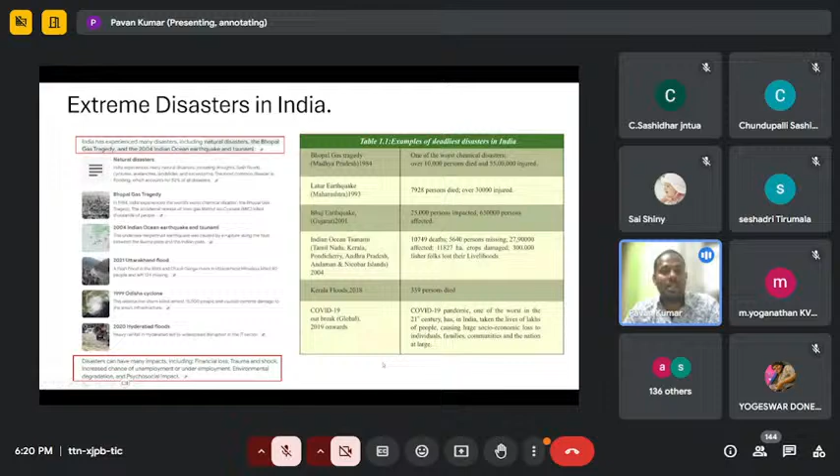Disasters can have many impacts, and the scale of impact can differ depending on the type of disaster, which I'll explain in a minute. As I said earlier, the recent Vijayawada floods are a big reminder that we need to really plan for this. If we don't mitigate it at this stage, the consequences will repeat again and again, which is not good for the economy or the country.

If you look at the types of disasters, they're classified into natural, which you really can't control, and human-made disasters. Within natural disasters, you have geophysical disasters, which happen because of geological disturbance. In this category you can include earthquakes, tsunamis, avalanches, landslides, volcanoes, mass movements, and similar events.

Another natural disaster category is due to extreme weather. Under this we have storms and cyclones, tropical cyclones being very common and increasing because of climate change. Because of these extreme cyclones, you get hydrological disasters, which is flooding, and also biological disasters, including pandemics, epidemics, and insect infestations. The classic example of a pandemic is obviously the coronavirus. These all come under natural disasters.

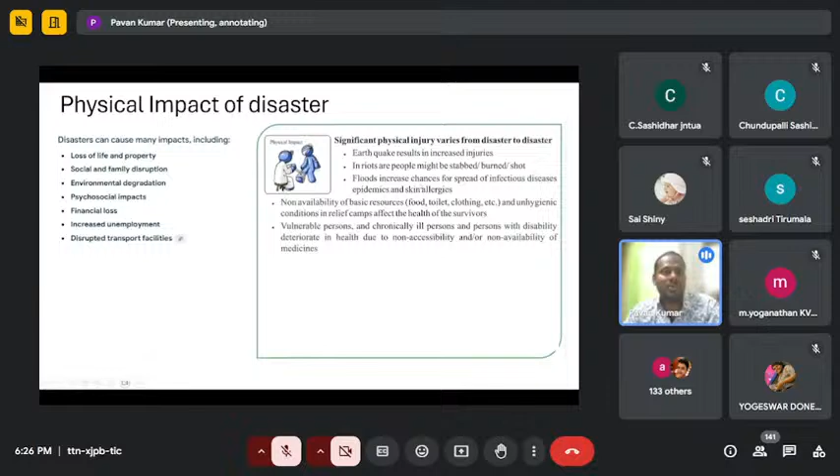At the same time, if you look at the psychological impacts of a disaster, they can also have a wide range. The community can experience shock, denial, sadness, worry, fear, hopelessness, helplessness, self-harm, blaming self or a god, and grief reactions. So the community will experience a wide range of psychological impacts, and I'll come back to who plays what role.

If you look into social impacts, that basically means it's affecting the routine of the communities. So if you take the Vijayawada floods, the recent floods, you can see how the community got affected. As a result, in relief camps, privacy and routine of families get affected, along with displacement and migration, loss of lives, widows, and emergence of single parent families - you can list many impacts. So in summary, the community is going to go through a lot of social impact.

If you look into the economic impact of a disaster, survivors' livelihoods are compromised subsequent to a disaster - financial loss due to damage to property, or death or disability of family members. Trauma and shock could prevent people continuing with work, increasing the chance of unemployment or underemployment, leading to families being forced to borrow money and end up in debt traps. Transport facilities are disrupted. So you're going to have different impacts, and the type of impact from one disaster to another is going to be different.

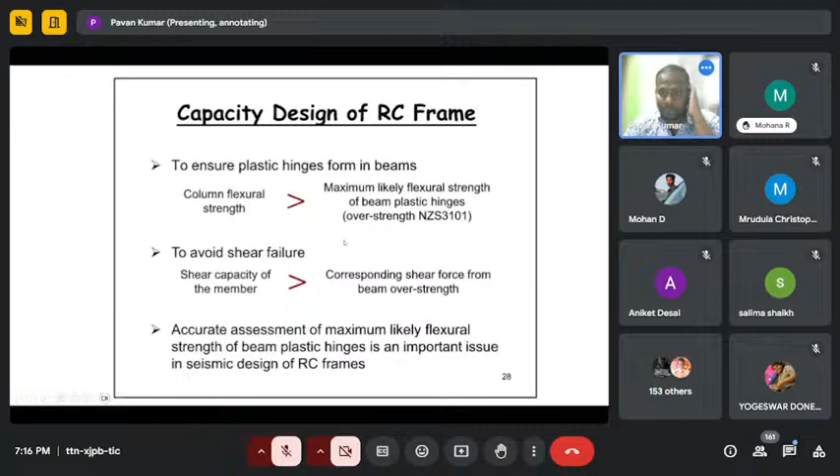Say, for example, you've got an ultimate state where hinges have formed and you've got a lateral load. This beam has hinges at both ends, with an over-strength moment capacity of MO, purely due to earthquake forces. Once you have these over-strength capacities of the beam, you can work out the shear V, which is MO at the left and MO at the right divided by the length of the beam.

That's the shear demand due to earthquake forces, which needs to be added to gravity forces - meaning to avoid shear failure of this beam, you need to design for over-strength capacities due to earthquake forces plus gravity, which will be significantly higher than what an analysis software gives you for these earthquake loads.

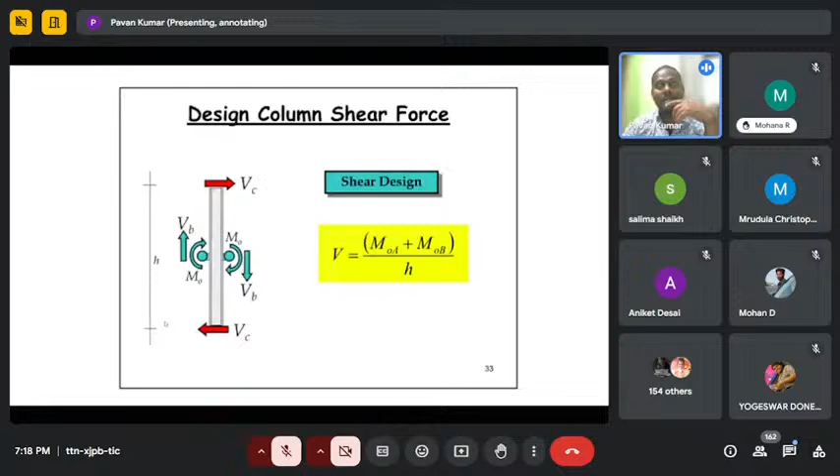If you design for this shear, then you're really going to make sure that shear failure is avoided at any cost. That's how you make sure the strength hierarchy is followed, brittle modes of failure are suppressed, and beams hinge first, which are the weak link if you relate back to the chain theory. So if an earthquake happens, these beams will go first. It's like fuses, right? These are the fuse elements.

And then you can't avoid hinging at the base, which is fine, because it's still a stable mechanism. With this kind of detailing, you can really make sure there is no sudden collapse of the building, and you can make sure even at a 2.5% drift, it's still standing there.

With that, I want to conclude a few things. One key thing is we need to understand that because of climate change, the annual number of natural disasters is likely going to increase. We are seeing more and more cyclones, more and more flood events.

Disaster management needs to be implemented for towns which are going to be converted into cities, for newly planned cities, and already existing cities as well. It's not a task one individual can do, it's a task entire organizations need to work together, and the government has a major role to play in disaster mitigation, preparedness, and post-disaster response.

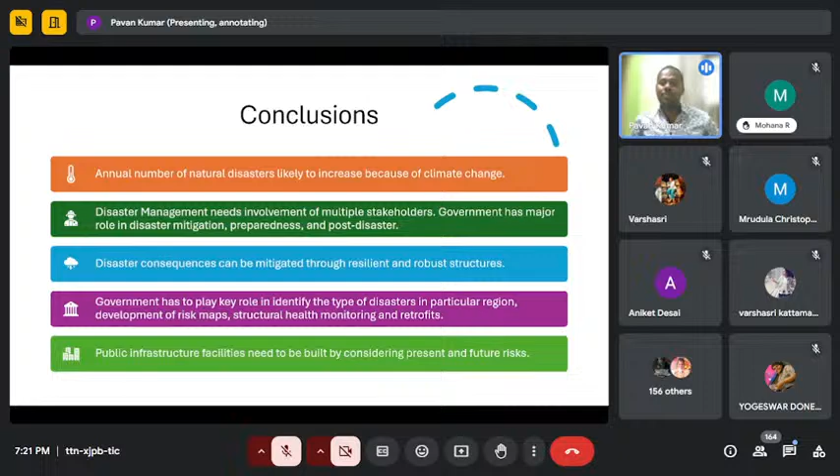And developing risk maps, identifying vulnerable structures, carrying out structural health monitoring, and fixing those structures. Public infrastructure needs to be built considering present and future risks. For example, if a road is being built, you really need to think of a national highway - what will be future risks, whether it's closer to a river, what kind of flooding activity can happen.

As I said, it would be foolish to say we can mitigate disasters in a day, by even 1%. It's a massive collaboration from local governments to state governments to central governments. There is a major role to be played by academicians who are going to advise urban planners and government policymakers.

As I discussed, you can achieve earthquake disaster resilient buildings with different techniques, by utilizing ductility, base isolation, dampers, braces, rocking systems, etc. But the easiest way you can achieve an earthquake disaster resilient building is by utilizing ductility, because you are retaining your conventional system. That's what the next point is.

One key thing to remember always: strong column and weak beam. As long as you follow the strong column weak beam principle when you design, and make sure those weak beams are ductile elements, and columns are designed for high strength demands so that you suppress shear failure, your building is going to be fine.

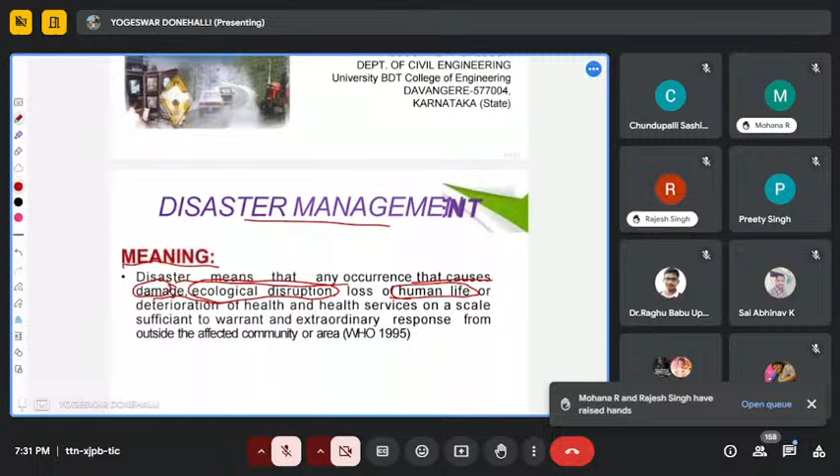Now coming to the types of disasters: there is natural disaster, and man-made disaster. If you see the figure here, floods are shown. Sometimes we are unable to control floods. Let's come to natural disasters, which include droughts. Major natural disasters are flood, cyclone, drought, and earthquake. There are also minor natural disasters, such as cold waves, thunderstorms, heat waves, and mudslides.

If we come to floods, we will discuss one by one. Regarding floods, from a hydrological point of view or water source, people take much care about that. But being structural engineers, we also have to take care—if a flood comes, how do we protect our buildings? Next is cyclones. Whenever cyclones come, low pressure is created and wind also increases.

Whenever the wind increases, building structures located especially in coastal areas may be affected by the cyclone.

Drought means automatically there is continuously no rainfall over certain areas, so people will be unable to live there. There is no crop growth, so all those things may be affected. Whenever drought comes, people usually migrate from one place to another, which increases population density in particular areas. That also may not be permitted for some reasons.

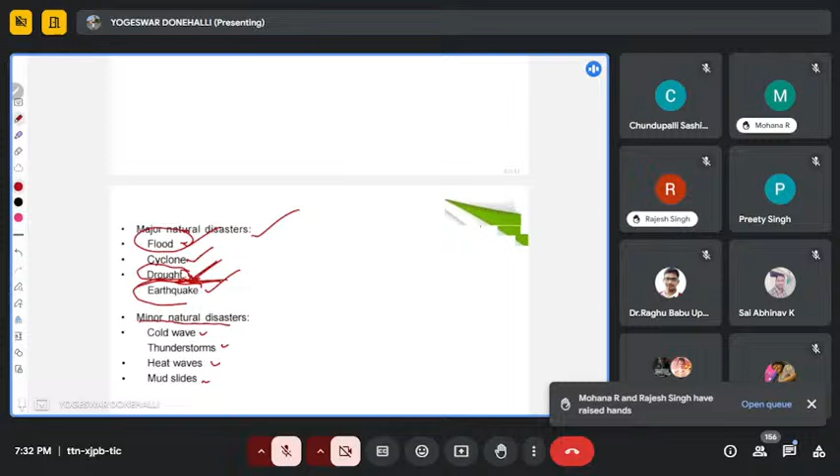Next is earthquake. Being civil engineers, we take much more attention on earthquakes. That is the major one, so we will discuss that.

Cold waves, we cannot obstruct this, but of course we can maintain against it. If you go to the north of the globe, then only you can expect cold waves.

Thunderstorms, whenever rain comes, thunder also will come. It also will affect human beings; some lose their lives due to thunderstorms.

Heat waves affect certain regions, especially if you take the globe at 0 degrees. These areas may be subjected to heat waves because of temperature. Sunrays may come directly, and the zone may be subjected to high heat, so heat waves may be generated.

Mudslides are again linked with floods. Mudslides may be linked with floods whenever rains or precipitation, from a technical point of view, is more, so automatically mudslides also come. Sometimes buildings or small houses may be constructed with mud, and those may slide because the cohesiveness between soil particles decreases. Whenever it decreases continuously due to rain, absorption of moisture and water content may cause mudslides.

So these are the major and minor natural disasters. Sometimes we are unable to control all these things. My point is these things we may not control because they form naturally.

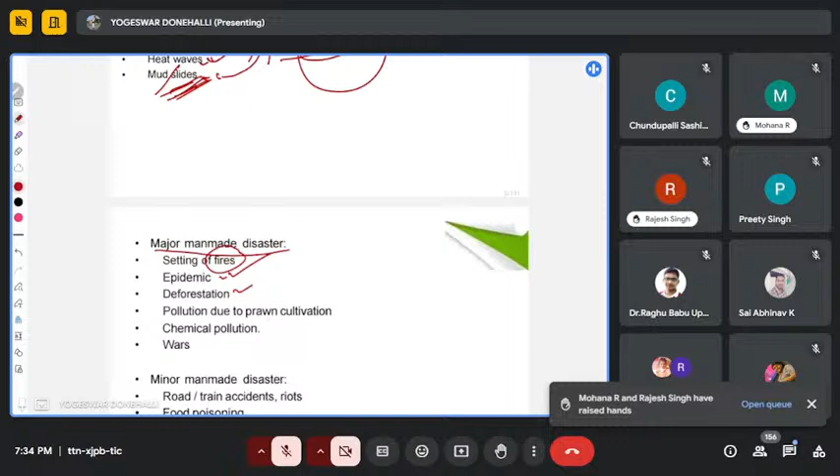Next comes major man-made disasters: setting of fires, epidemics like the COVID virus, deforestation from continuously cutting trees, pollution due to prawn cultivation, chemical pollution, and wars. Recently we have seen the Ukraine war, between Russia and Ukraine. This is also one of the disasters. With all these things, humans may be affected.

Next is minor man-made disasters: accidents, food poisoning, industrial disasters, and environmental pollution. These things, up to a certain stage, we can control by providing guidelines from the government, either state or central, or the World Health Organization. Some things we can control.

Whereas if you come to natural disasters, sometimes we can predict them, since a recurrence period exists, for every 35 years or 50 years. So by taking the past data, we may consider the design of structural members, elements, or the entire integrity of the structural elements.

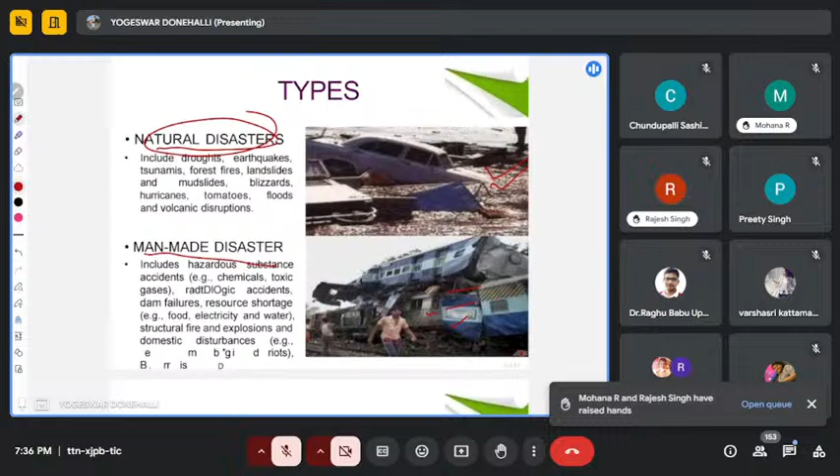So what I would like to tell you is natural disasters cannot be controlled. For that, we have to see protection by anticipating things in advance. Minor and major man-made disasters we can control by taking precautions; each individual citizen has to take care, and only then can we minimize man-made disasters. So this is the broad overview of disasters.

Now my talk may be focused on the earthquake. So here, this is the earthquake.

Especially, so far the previous speaker has focused on moment resisting frames. Many times, if you take India or other countries, still they are not affordable to go for construction of houses with moment resisting frames, or reinforced concrete structures. Still many parts of India, especially the north side, and to some extent the south side too, rural areas still go for masonry structures. So how do these masonry structures perform during an earthquake? That is the major discussion today.

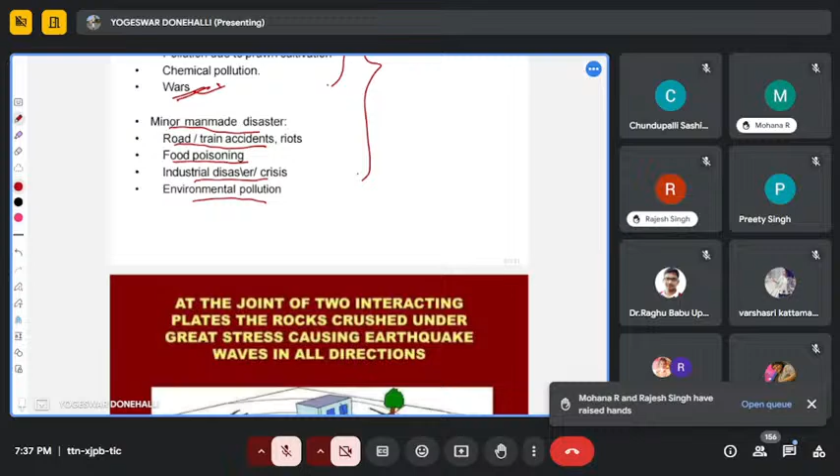Now come to the introduction. If you see this image, the focus is a disturbance that may occur in the earth. Whenever this occurs, automatically this disturbance will propagate that energy. If we call that the disturbing energy, that energy may be propagated from one place up to a certain distance, then slowly it may nullify; so energy dissipation takes place.

Whenever energy is dissipating, automatically a disturbing energy may travel. If any structure is there, it may get hit. The energy in the form of waves will hit and cause disturbance for the building, making it have small movements, lateral displacements.

So the major question is, what is the reason behind this? Let me take one example. If you take a small stick and apply movement continuously, at one stage, as the moment keeps increasing, it may break into two pieces. Let's say it's a wooden stick, a brittle material. Whenever it fails and breaks into two pieces, automatically a sound also comes.

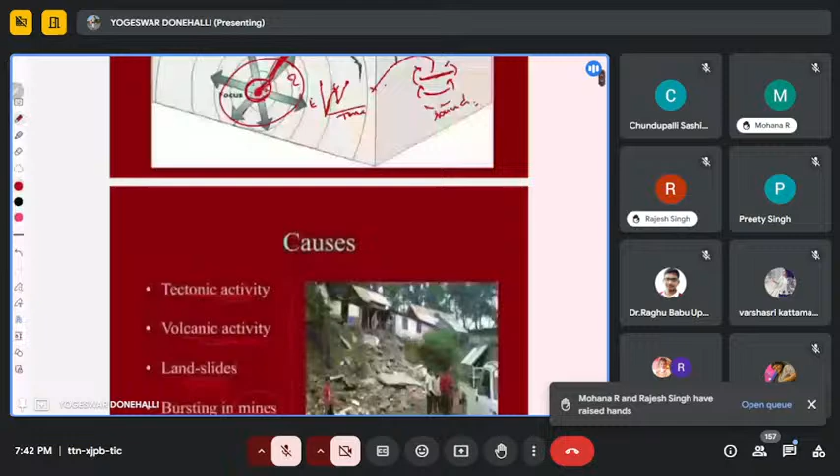Now come to this one. Wherever it is created, that point we call the focus. Many times you can see, whenever an earthquake comes somewhere over the globe, in the news you see the focus, and immediately after, the news gives the epicenter. That means wherever it is generated is called the focus point, and the exact perpendicular distance from there is called the epicenter.

Next, wherever the building is located, that is the epicentral distance. The farther away from the epicenter, the less the disturbance for our structure. The closer to the epicenter, the more the disturbance.

Where it is located is also very important. Sometimes in Gujarat an earthquake takes place and the effect cannot be felt in Andhra Pradesh because the distance is too long. Recently in Telangana also a little disturbance happened at a particular location. Depending upon that, we provide a scale, the Richter scale.

Next is how it may propagate. See, if you take a water body, just like a lake or pond, and throw a stone in the water, it creates a small disturbance to the still water. Immediately a disturbance travels in the form of waves. It touches the boundaries of the lake, and whenever it touches, it reverses back. So a to and fro motion takes place, and that gets nullified due to friction between the particles existing in the fluid. So it takes time.

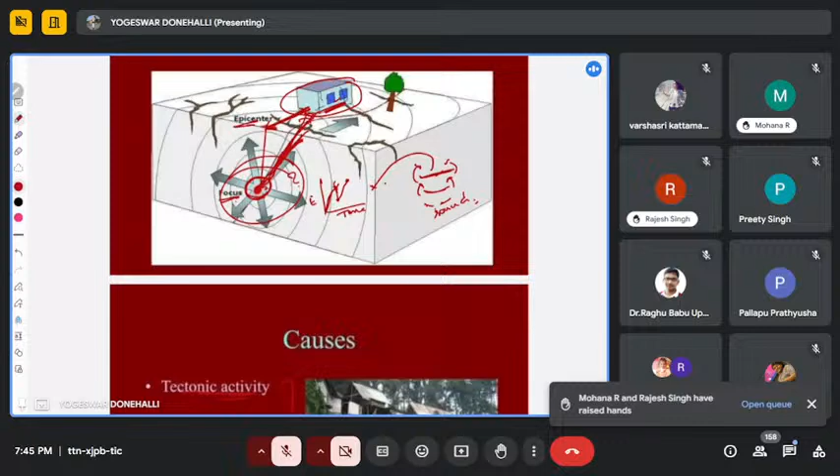So there are different types of waves, we are discussing 4 types here. The first is the P waves or primary waves. Consider a rectangular block, just like a beam element. Each element may only undergo compression or tension.

Coming to the secondary waves, the secondary wave transmits in the medium at right angle to the direction of propagation. It propagates like this, just like up and down.

Next form is what we call the Love waves. These form in the horizontal direction. The movement is like this, in a horizontal plane, moving like this.

Next is Rayleigh waves. Not only do they move in this direction, but they almost always accompany this with twisting also.

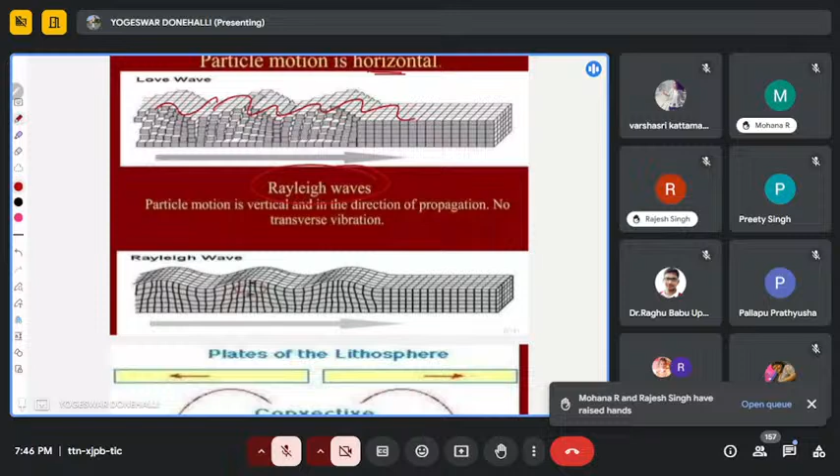So out of the 4 types - primary waves, secondary waves, Love waves, and Rayleigh waves - the most dangerous for our structures is the Rayleigh waves, because not only does movement take place in the horizontal direction, rotation also takes place. Unfortunately, many times the capacity of our structural materials for twisting is less compared to axial compression and axial tension.

So these Rayleigh waves are most damaging for our building structures. It depends upon the material's capacity - how it resists in compression, in tension, in torsion. That's why in the curriculum we teach each chapter separately, then put it all together to design the structure. Whenever Rayleigh waves occur, both horizontal movement and rotation take place, making them the most affected waves, causing more damage to structures. Again, that depends upon the intensity also.

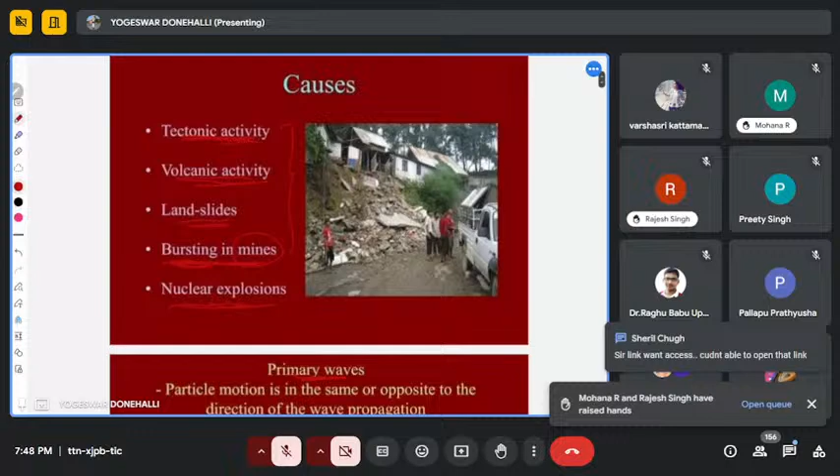So these are the waves that propagate from the focus to the epicenter and epicentral distance. Next, coming to the plates - as I said quickly, there are 4 regions here, and these regions cause the disturbing energy for the earthquake. Next, let's move on.

So here are the plates of the lithosphere. What does it mean? If you look closely at this image, taking the earth as one unit, and looking at the layers from inside to outside: at the center we have the solid core. At some distance from there, we have the liquid layer. Again, the material at the top, over the surface of the earth, is where we are living. So here, this is solid, this is solid, and this in between is like a liquid.

If any movement happens in the liquid state, automatically these top layers may be subjected to disturbance. For this, he is giving a good example here.

If you take any vessel or tumbler and give it heat energy, automatically the water particles near the heat energy take the heat energy through transmission. Whenever the water particle takes the heat energy, its density becomes lesser. Whenever the density becomes lesser, it travels up. At the same time, the top level cold water comes to the bottom. This process continues until every particle of the water reaches almost equal intensity of temperature. That's why this happens.

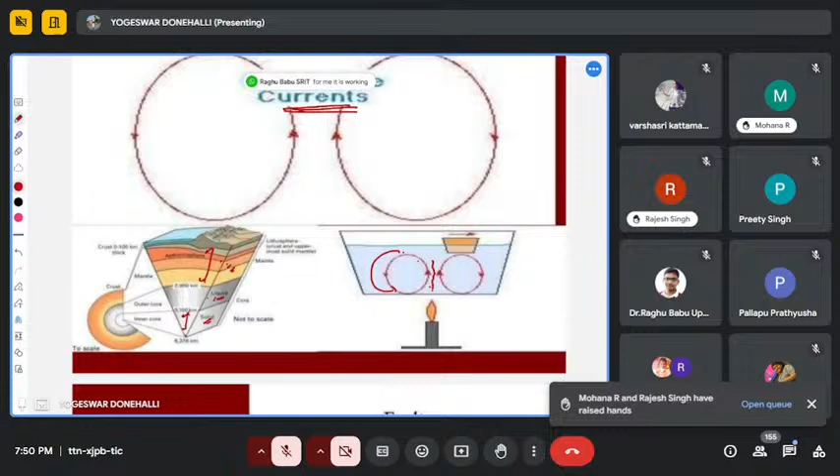Not working? Huh? Check it. Is anybody working? Audience: Yes sir, yes sir, it's working, yeah.

So whenever this happens in the liquid, this type of convective current will happen automatically. So any disturbance in the liquid means automatically this top layer also will be subjected to disturbance.

So the next question is, here you are providing the heat energy - where is the heat energy here? Who will supply the heat energy there?

If you come to the inside, there's the inner core, outer core, and mantle. Very broadly, we say this is the outer core, and this is the inner core or mantle. Sometimes radioactive materials are available in the earth, and these materials continuously emit energy. That energy is also one of the causes for the convective currents within the outer core liquid areas. Not only that, pressure differences are there, and at the same time temperature differences are there. So many factors are there - out of those, I took one region just like a convective current as the example. So this may be one of the reasons.

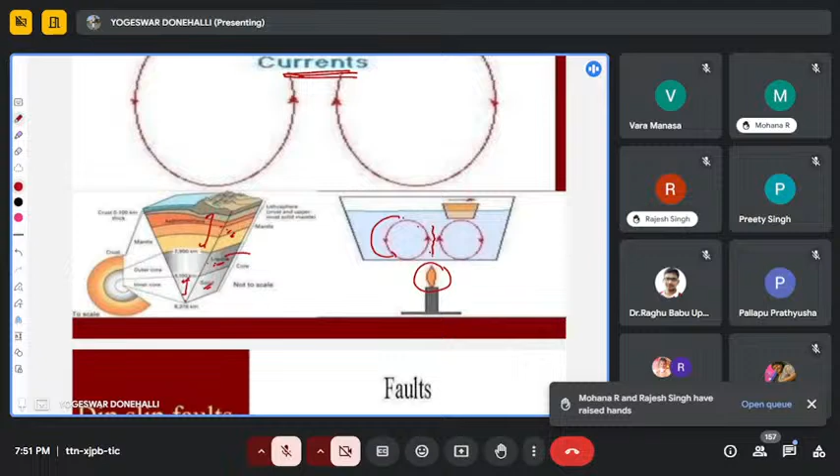That means if you see the globe, the earth's globe, there are many plates, just like palms. I will come to that a little later. Okay, so now let's come to the faults.

Next, the faults. As I told you previously, if you take any stick and apply movement - force, axial tensile force, or axial compression force - in all stages, it may lead to a break. That means you continuously increase the movement, continuously increase the tensile force, and at one stage the material will break here and here.

That means disturbance. Similarly, if two things are there and you continuously try to move one over the other, this part separates, this part separates, and they move like this. Otherwise, it's one layer over another layer. Let's see here also the same thing, but with movement in the other direction. So out of these things, anything may happen.

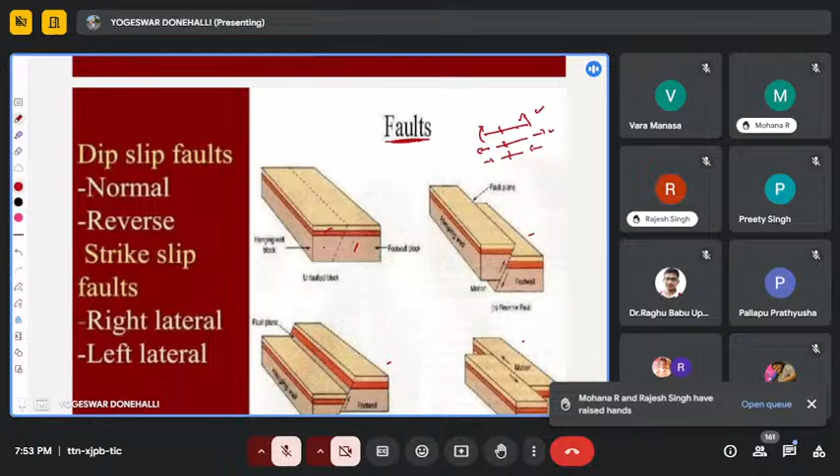During this stage also, the rupture may take place from one solid mass to another solid mass, creating disturbance. As I told you in the example, when I tried to break something, at the edge of the break it may give a sound. So there also, sound will come, and at the same time disturbance is created. These may be the reasons.

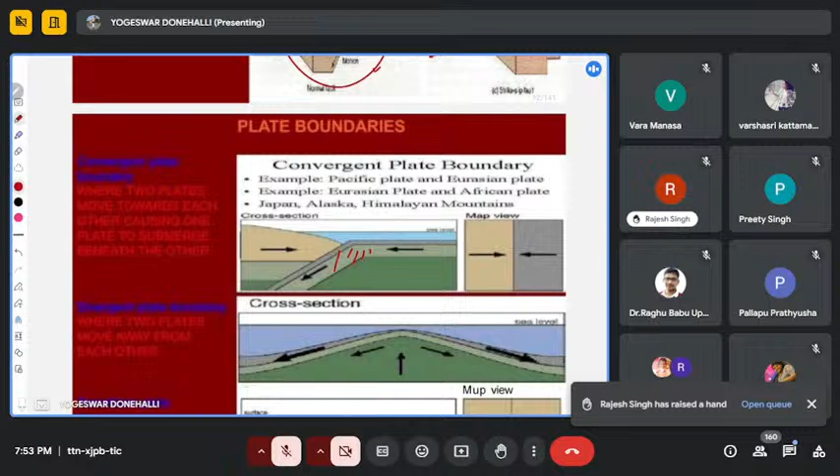So next is plate boundaries. Here we are taking two landmasses, with boundaries like this. They may slide one over the other. Not only in this region - if the movement is taking place in the horizontal direction, that means in the lateral direction, sometimes it might not happen exactly like this - it may slide like this. So if you take this as one layer and this as another layer, it may sink, or otherwise it may go up. This also may happen.

Next, see here - these things may happen like this part and this part pushing like this, or coming together like this.

Many times you can see this type of activity from the volcanic activities. Previously I told you about this one, the outer core. So whenever the temperature means the pressure difference is there, high pressure to lower pressure, if any loopholes or gaps are there, it automatically moves from higher pressure to lower pressure, taking that path. So it may come in the form of volcanic activities over the globe. In some countries you can see the volcanic activities are very active.

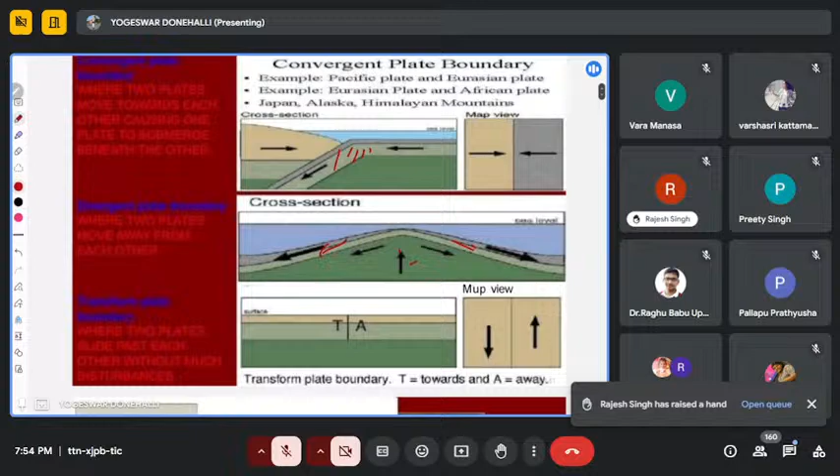So this may happen, the rift formation like this, it may happen. This is just the introduction. Now let's come to the reality.

So here the Eurasian plate is there, next is the Indian plate. Two plates are there. If we take the globe and spread it in a plane, we can see some plates are there. Just like if we throw a piece of paper on water, whenever it creates some disturbance, the plates may move. So the same thing may happen here also because of the liquid core. So here Eurasian plate and Indian plate, two plates are there.

Due to this movement, the Indian plate is moving or riding under the Eurasian plate. That's why sometimes you may have heard the news, either on WhatsApp or in the newspaper, that the Himalayas' height is increasing after every few years. Yes, it is truly correct.

See here, 55 million years ago this was here. After 28 million years it moved here, and 10 million years ago it moved again. It may be due to the Eurasian plate, where subduction takes place and rising takes place. This plate is coming and is not going there, meaning if we assume this is the Indian plate, it's going up here. So the same thing will happen here.

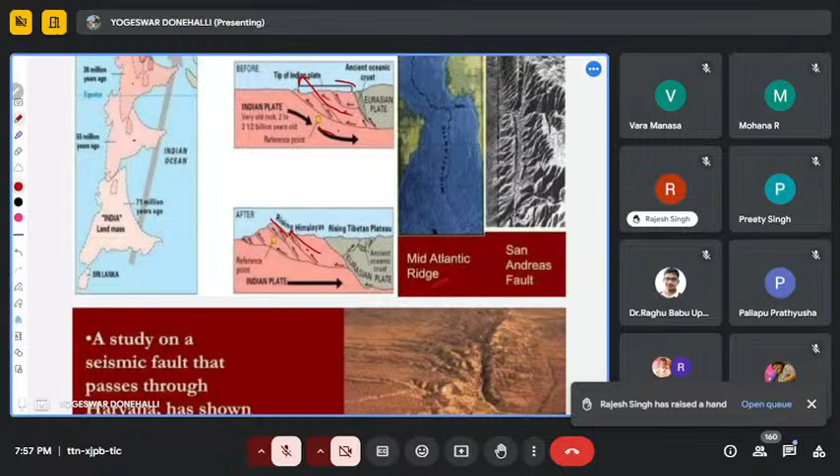See here, this also shows the rising of the Himalayas. One plate is moving, the other plate is moving like this, this is moving. So in reality, this is also one of the picture images here. You study the seismic faults in Haryana, I showed that in the Indo-Gangetic plain. So this type of disturbance is also created, and in these images a valley is created here.

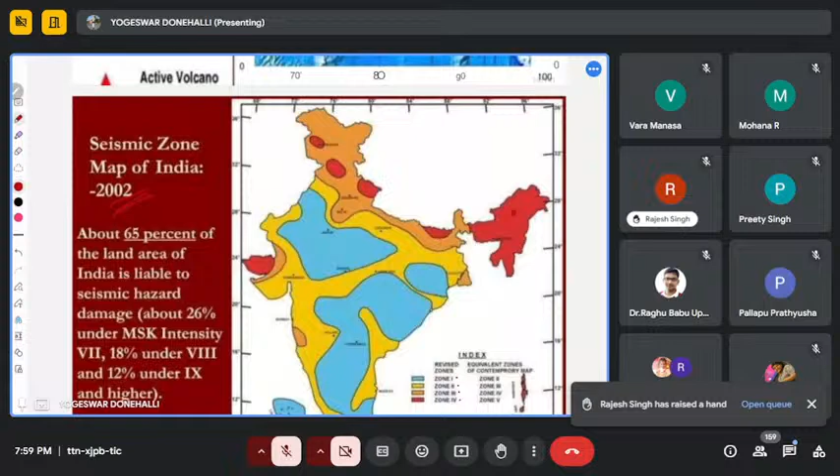Now come to what I showed in the 2002 image, very long back, and in 2012 again in 2016 it was revised. In the initial stages there were more zones: zone 1, zone 2, zone 3 and zone 4, very long back in 2002. Wherever red is shown is zone 4, meaning that red part is the more affected area for earthquakes. Let's start with zone 1, the blue indicates zone 1.

Later, by observing the Bhuj earthquake, this graph was changed. That's the image of the Indian map. The zones were changed, they merged zone 1 and zone 2 and made it a single zone 2, so there's no question of zone 1 existing anymore. That's why even Gujarat, the Jammu Kashmir area, and the seven sisters of the Northeast, all these are more prone to earthquakes.

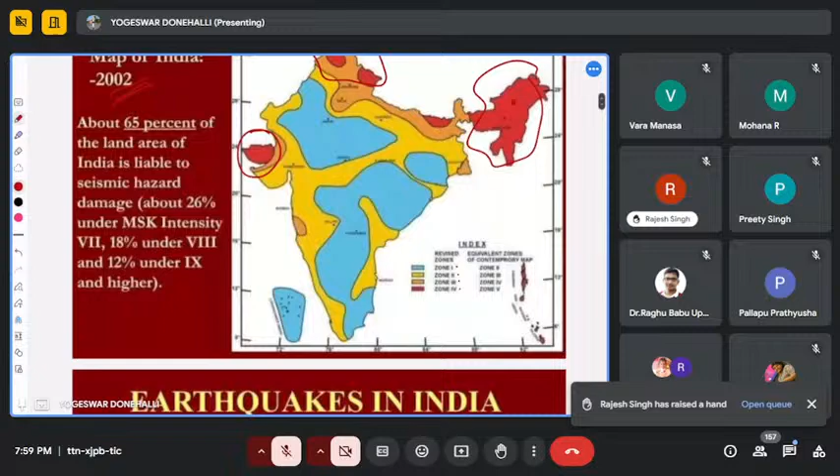So people who are living here, we should be cautious about the earthquake. If we go back and see the questions here, past earthquakes, very recent in 2001, with earthquake magnitude of 6.9, nearly 7, on a scale up to 8. So here, 14,000 people died.

This is very pathetic, even though technology is there nowadays, still we are not taking care about these disaster things. It is not a joke. 14,000 people dead in one incident means imagine they are our relatives, or our friends - how much we would feel bad.

That's why the Bhuj earthquake in Gujarat - if you see earlier, even in 2002 it was identified that a part of Gujarat is also more prone to earthquakes. Unfortunately, one of the coordinators has completed PhD in Gujarat state. I think Raghu Babu, one of the coordinators.

Of course, later by seeing the effect of the Bhuj earthquake, we changed the Indian map - zones were changed with the colors. So those who are interested in this area, you can get the 2016 IS 1893 code.

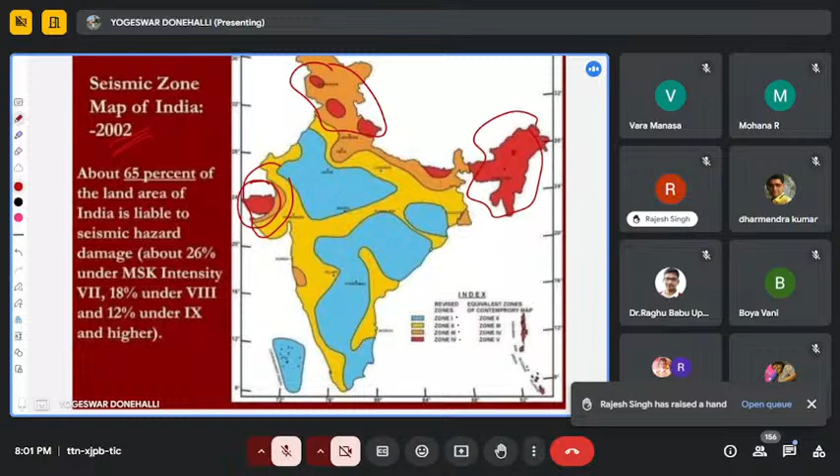Next, this was a very brief introduction about the earthquake and its effects. Now coming back to the previous speaker - once again, more attention was given to the structural point of view for moment resisting frames. Now let's come to masonry.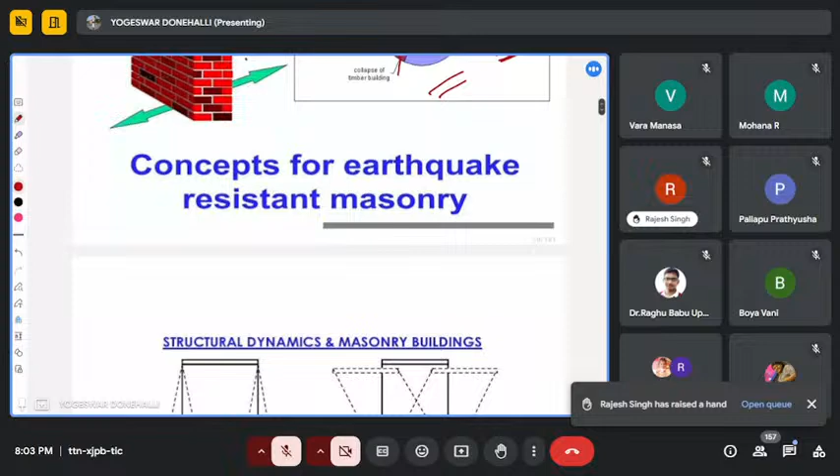Now more attention to the masonry structures - how to minimize this effect? What may be the effects on the structure here?

If we come again to structural dynamics and masonry buildings, there is quasi-static and resonant - so there are two things. Resonance is there, and one term, natural frequency, is there. Each and every element has a natural frequency, so omega equals root of k by m, where k is the stiffness of the element and m is the mass of the corresponding element or structure as a whole. So this is the natural frequency.

So this natural frequency depends upon the material properties. Just by taking the stiffness and mass of the elements, we can find out the natural frequency. The forcing frequency means whenever force is created - already I said in the starting, the disturbing energy may be created within the earth and propagated or diffused in all directions.

So if you take any one structure, you can expect it may move in three directions due to the disturbing energy - one is the vertical direction, and the other two are horizontal components. But many times we only take into account the two horizontal directions. The vertical direction, of course, we can consider, but we may neglect it because the intensity may be decreased due to self weight.

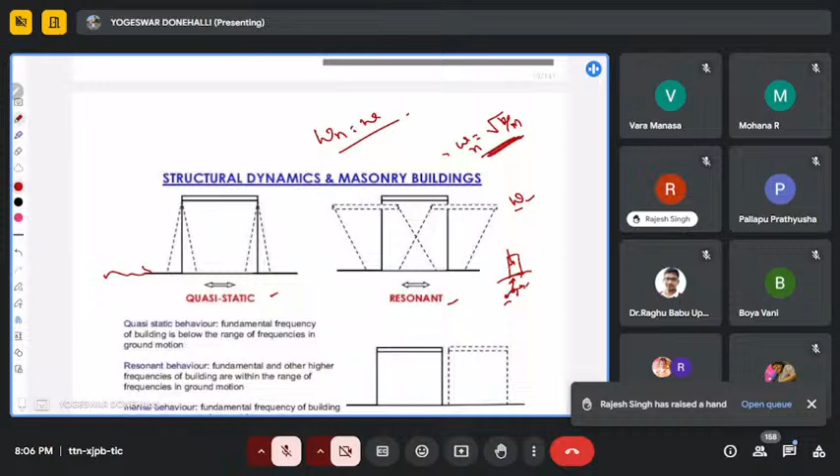So it goes to maximum level. Though sometimes graphically you can say that it's infinity, but it has some value before failure, so that should not be matched. That's why even at lower studies, we may see that whenever there is march past on bridges, the commander or leader may say to stop the march past. The reason is these soldiers may create disturbance by generating force through their steps on the bridge. When that frequency and natural frequency match, the bridge may be susceptible to vibrate, leading to failure.

Generally you may study it in the lower classes, only the simple sense of it. Some of us may understand it in a proper way with time, some may not. Whenever the age goes on, we can understand it in a proper way. That's why resonance is a very important concept.

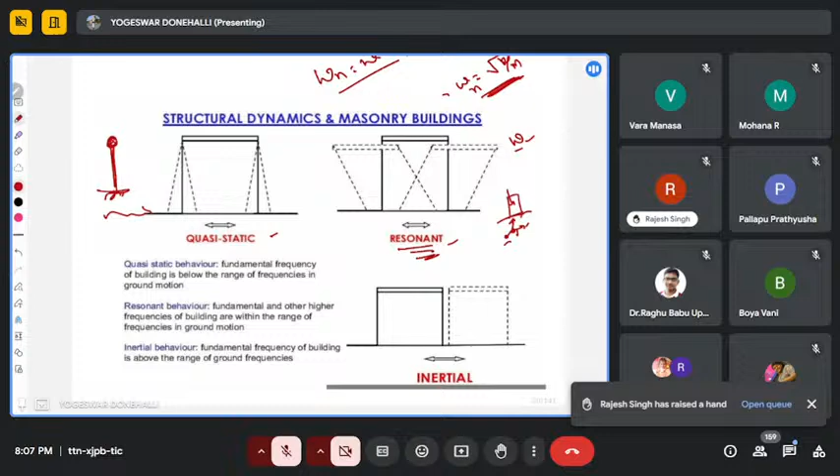So it has its own limitations. How much is permitted? That's again a question. Displacement and drift may take place. That means if we connect one particle to another particle, that relative displacement we are calling drift. If we take the displacement of an element, just like if we take this beam, going to the analogy, the entire mass is concentrated at the floor or slab level. Whenever a disturbance is created, this may vibrate like this, meaning displacement occurs. That displacement should be within the permissible limit.

Just like we are taking the single degree of freedom, let me go into a little analysis. Single degree of freedom means I am taking only this mass, like this, so I am permitting only this delta. So can I expect only vertical direction movement? Yes, you can expect. Can I expect rotation? Yes, rotation is also permitted.

So that's why degrees of freedom are considered by the designer - vertical, horizontal, and rotation, in each x, y, z direction. If we come to the z direction, rotation is there. If we take about the y-axis, also rotation is there. Different ways you can consider it.

So many times in our academic curriculum, we pay much attention to displacements with the delta value. For this also, code is there - earthquake code has provided the limitations. Strictly speaking, our softwares may provide all the information - resonance frequency, natural frequency, forcing frequency, ratios, and displacements in x direction, y direction, movement displacement - all will be provided. But the important thing is how to provide the equation.

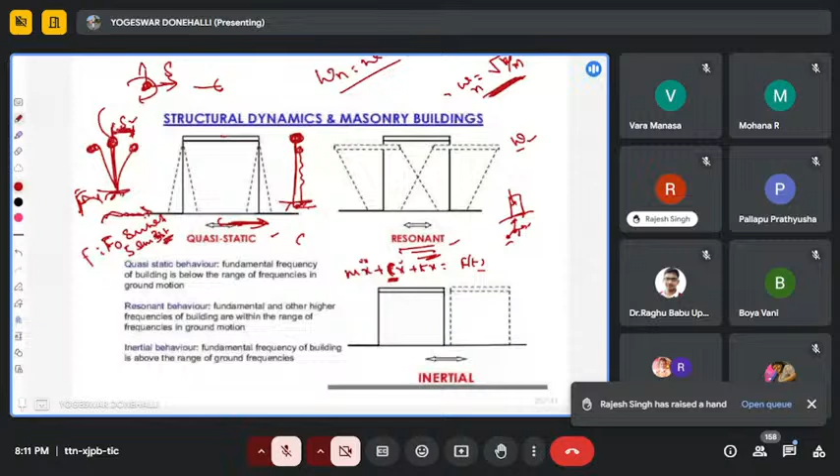One question may come to mind: why are we providing all three? One is enough for reference, no doubt. Once you find the displacement, ds by dt gives velocity, and dv by dt gives acceleration. But providing the information as f equals ma, that is Newton's second law.

So this energy may be linked in the form of f equals ma. With acceleration, the formulation of the things is very easy mathematically. That's why more attention is given to the acceleration spectrum.

That may be applicable to all, but how far it is applicable to our masonry buildings, we will see. So whatever I said, this is the natural period, and this is the average response acceleration coefficient, the acceleration SA by G.

So SA by G is the coefficient, adding the acceleration into some factor, so K into Z value. Z is zone factor.

So by seeing this natural period, to make one natural period, we are taking the disturbance in the form of waves. One wave, you have to take the time period. So it is linked with structural dynamics.

By seeing the natural period for each and every structure, again it depends upon whether it's hard, medium, or soft soil where our structure is resting. You have to take that into account to find the SA by G. Once you find the spectrum acceleration, then your journey starts to solve and find the responses of displacement, velocity, and acceleration.

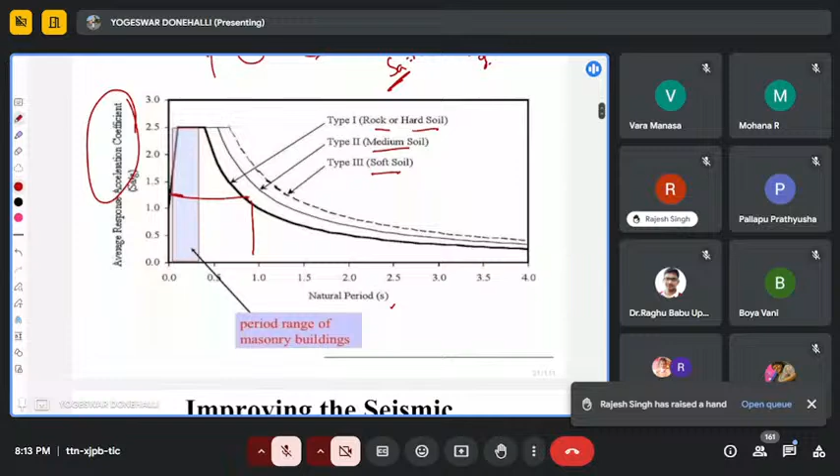Any of this we can call earthquake resistant design of buildings. How to develop this curve and all those things is a second story. Now let's come to our masonry buildings.

This is the example for masonry buildings. All over the world, as I said, many families are still below the poverty line or at the starting stage of the middle class.

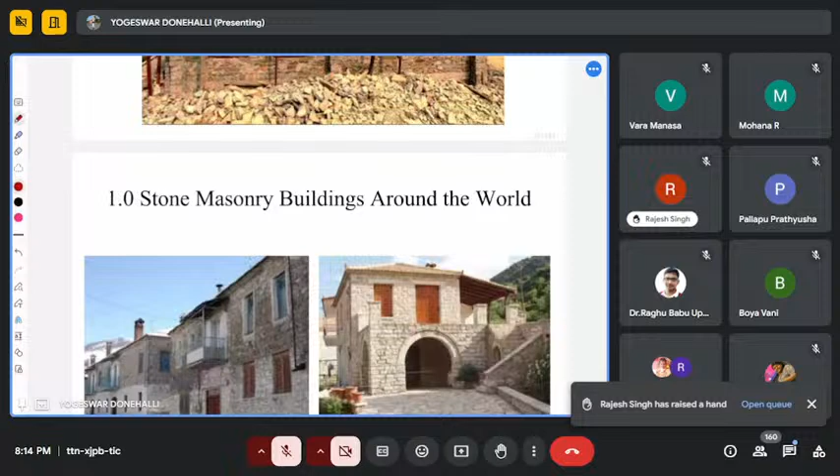So all the starting level middle class people may not afford to go for construction of reinforced concrete buildings, because financially it may differ from one family to another. Now let's come to other parts of the world. Will stone masonry structures be there? Yes, it is there. See, if you take Greece...

These types of stone masonry constructions exist. Of course, civilizations developed a long time back. People moved from one place to another, and whatever technology they knew, they shared it. One group of people shared with another group, then slowly the dissemination and dissipation of knowledge took place. Slowly they adopted new things from one set of people to another set of people. You can learn about this from world history or Indian history.

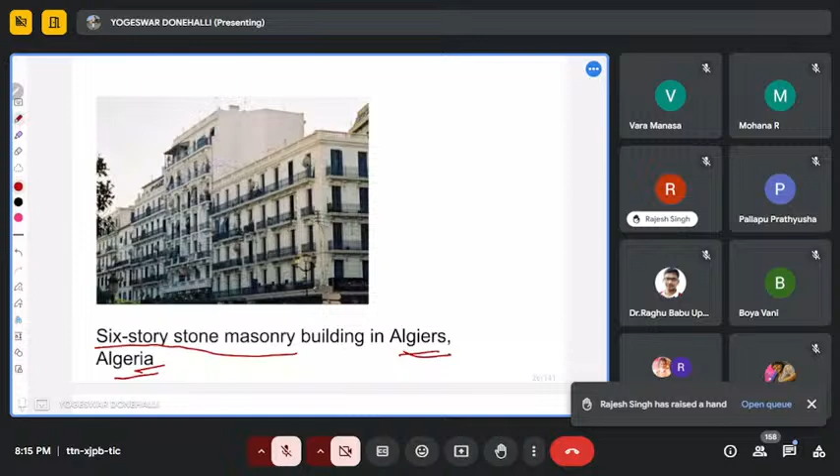Now come to one more country, I will show Italy, then Turkey. So there also structures are there, stone masonry structures. Next is Algeria, so this is also a 6-story stone masonry building. Next is India, next is Nepal. So all these things, in Nepal, India, Algeria, and Turkey, and also Italy, Greece...

One thing you should understand is that if people are going to construct buildings with stone masonry, in other words we have to throw light on the availability of the material. That means whenever stone material is available, and available at the lowest cost, usually people will go to build with that. That's why in and around India, and some other countries too, people build houses with stone masonry because the material is naturally available.

The stone is maybe cheap compared to RCC ingredients, just like reinforcement and cement, all those things. Next, of course, slowly people are changing. As their economic position and GDP values increase, people are changing, taking place. Still, many houses are there with this stone masonry.

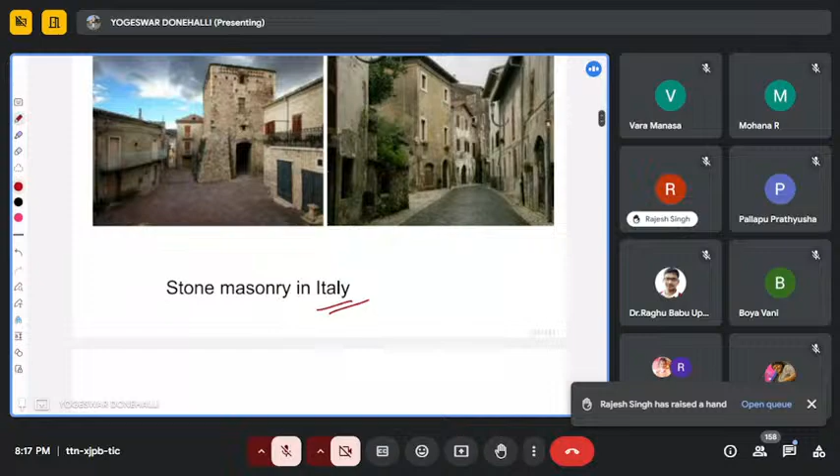If we closely observe, even if you go to rural areas, even now some houses still remain that our forefathers, our grandfathers constructed. So closely observe what I would like to convey here: sometimes there is no proper joint, simply resting over the other, that's all.

If we take the stone column pedestal here and the timber post, there is no joint, simply resting, just like a simply supported case. So these intermediate pieces also are resting, joints were not there.

As I told you previously, whenever the structure is there, if any disturbing event occurs, it has to be distributed through the members to the top level. That means inertia force comes, it moves back and forth like this, that inertia effect is there. The member should transmit the disturbing force to the top level.

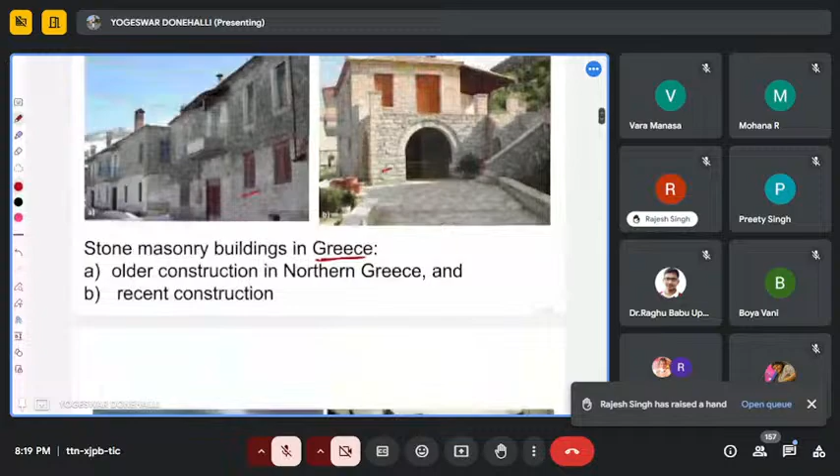That is shown even in the previous slide also. On the first slide, again I'm showing the same slide here. See here, this force is transmitting and this will affect as quasi-static or resonant. Now come to this picture.

So there is no perfect joint, meaning whenever the disturbance comes, a small displacement takes place from one member to the other. So the joint is not perfect. What happens? It leads to failure. So individual elements behave in different ways because material properties also may differ.

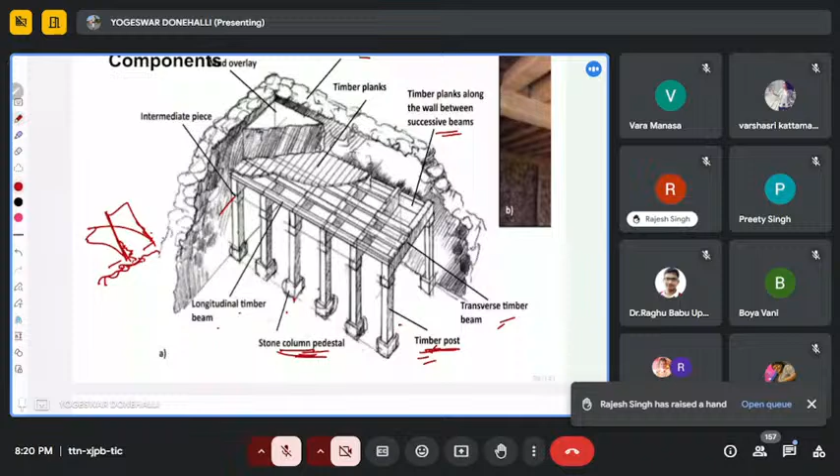Some materials, timber posts may have some resisting capacity to take lateral loads, and stones may have different lateral load behavior. This uncoursed random rubble stone masonry will take on different engineering properties in a different way. So there is a mismatch in the compatibility of material properties, and it immediately leads to failure.

Now come to floor and roof structures. If you take arch structures, even now Britishers' constructions, if you go one place to another by rail, here and there we can notice this type of structure. Whenever these structures have a joint here, at the abutment, abutting faces, these abutting faces may be very strong. Unfortunately, if we provide a loose joint, the purpose of the arch action fails.

The purpose of the arch action failing means, if you take the vertical component here, the bending moment is reduced due to the horizontal component, as you have studied in structural analysis. So whenever resisting the developing horizontal thrust and vertical reactions is improper, the design is improper, the connection is improper, automatically the entire thing may lead to collapse.

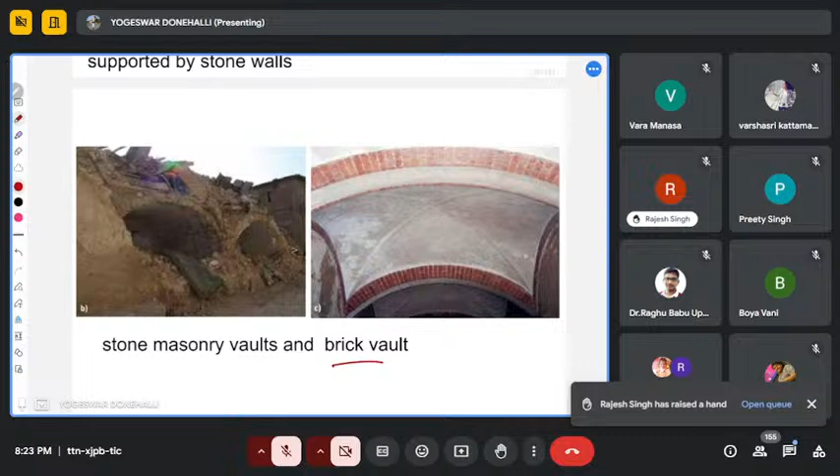If there is any disturbance inside, meaning from bottom to top level up to the roof level, it creates the problem of how to distribute the disturbing forces from one member to another, because a perfect joint is not there. So it's also one of the failure modes. In static condition it is well and good, no doubt, but when it comes to disturbing energy or disturbing force, then the problem comes.

If you see the old structures here, so here and here, see here, masonry failed here in Nepal. Even in our rural villages also, you can see this type of wooden beams, circular wooden beams.

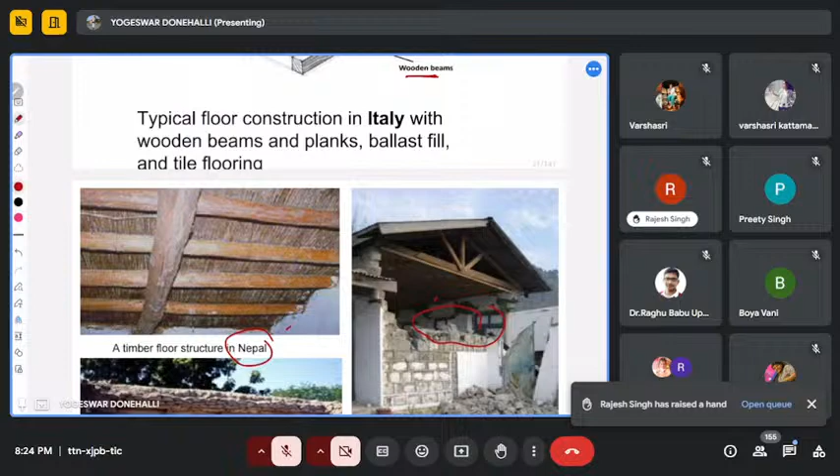Next is stone masonry walls. See here, wall is taking here. Next is slab with reinforcement. Nowadays, in certain families even now, houses have the top provided with a mud layer. So slowly they are removing the layer according to their financial capacity, and they are providing the reinforcement slab only. This reinforcement slab is simply resting on the walls. Whether you are providing a perfect joint in between the wall and the slab is no.

So whenever disturbance is created, it may propagate in all directions. When this tries to move, push, either to-and-fro motion will take place. At that time, this behavior and that behavior may be different.

Next is here, see the joint here. So one more observation is, here stone masonry is there, stone is there, mud mortar is there. But being a civil engineer, what you have to think is, what is the bonding capacity for the mud mortar? That means it has to adhere stone to stone. What may be the bond strength?

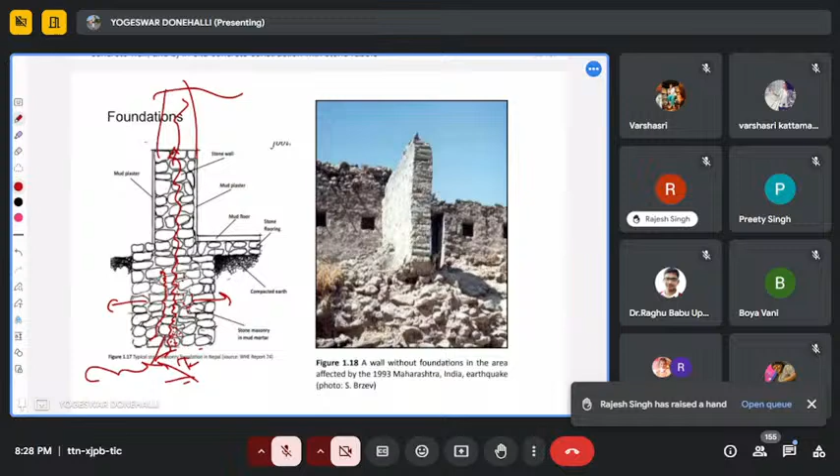The question is the mud mortar's capacity is very less. Here also crack may propagate, here crack is propagated. Probably sliding may come like this. When forces are more, it may try to expand laterally or bulge. Whenever bulging happens, a gap may form. I will show this in the next slide.

So see here, this image is the real image I'm taking here. This structure is good, but here at the transmitting stage, the materials may be separated. The stones were separated from the mud mortar. So next, see one more joint. This is one more joint here.

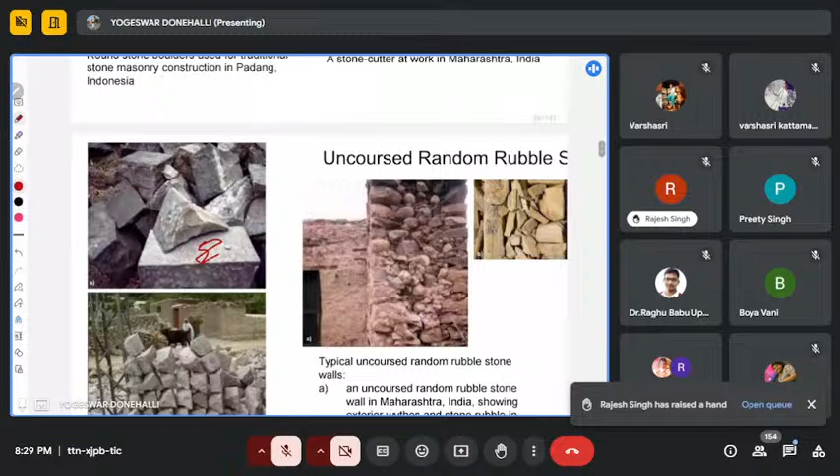Next is how the shape of the stone also impacts a lot, a very important factor, how it impacts. Sometimes we may provide only stone walls one over the other, that means piling up, with no mortar at all. Of course, this is for minor works. Even for minor works, a person doing his work, if an earthquake comes with a small disturbance and he doesn't sense it properly, or if aged people are there, for them to come out from that place may take time. By that time it may fall, and human loss may take place. That's also a possibility.

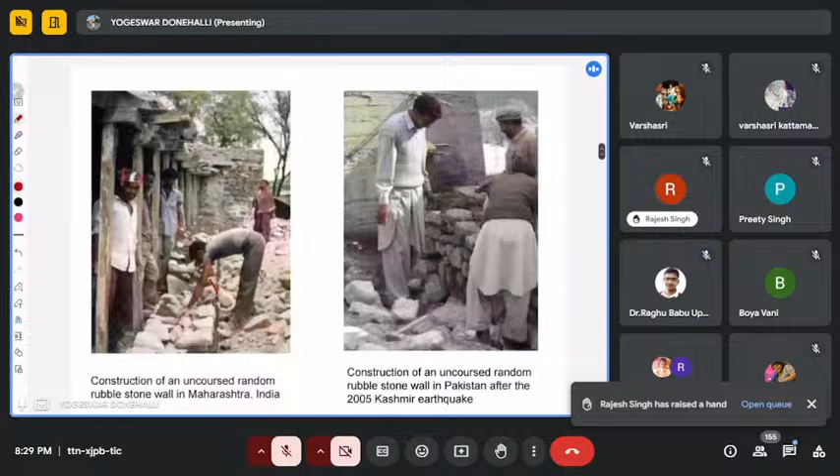See here, almost all have no mortar. So in certain areas the mortar is absent. See how they are providing here, each and every layer of the stone should be provided with mortar. See uncoursed random rubble stone masonry, the size of the stone is also not uniform in one layer, up and down layers are there. Small stones, different sizes of stones are arranged with the mud mortar. Whenever this type of mortar is used, more and more connecting mortar is required.

See here, the size of the stones may also be different, one is bigger size, one is smaller size. Again, it may not be properly jointed.

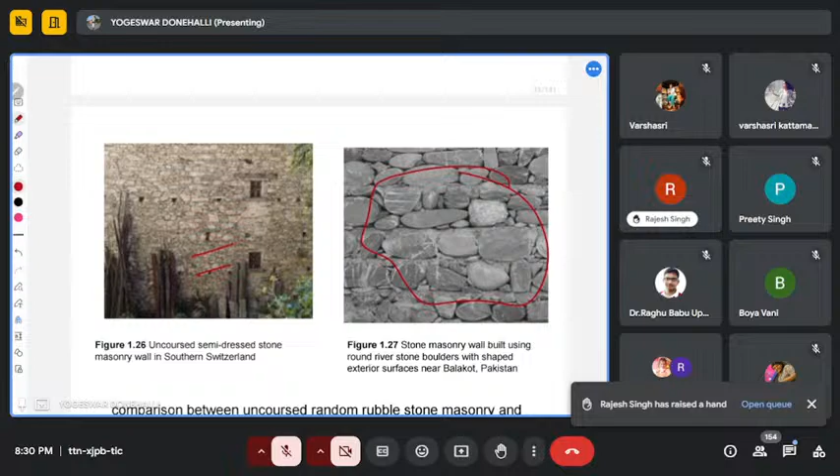So next is, see the cross section of the wall, real image we can see here. Whenever it comes, the position is perfect shape here, but here there is no perfect shape. Imagine this is one stone, the shape is like this, pressing is there. That means if you provide small stones in the masonry, it may take a little more time to collapse. Here, see the joint is almost all very big.

The question is, sir, hitting is like this, you are showing in this way. It means previously I said in 3 dimensions you can see the disturbing energies, sometimes along the movement also, so in vertical direction. If horizontal direction, if you come to here, immediately it may take more force to detach. If you come to here, there is no much force required, immediately transmitted again it goes to here. That means whenever it's separated, this part and this part may be separated, it may lead to failure.

So what to do? Just see here, timber bands we are providing. Closely observe here, it depends upon the availability of the material. We have to provide the connection here, so this side to this side corner. Why the more attention to corner? Whenever the stress flow takes place from one area to other area, sharp edges may cause a stress concentration, a smooth flow of stress may not be there. It is the major reason, so that's why we have to strengthen this area.

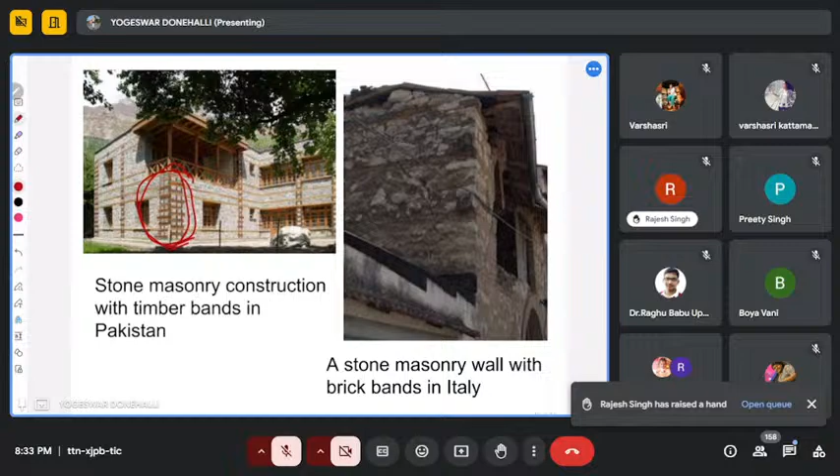Next, see here, actually masonry, size is more or less same. If you closely observe, the joint is here. So this and this, of course even now in brick masonry we can see this type of joint. If you provide the joint exactly here, disturbing energy generates in 3-dimensional, so immediately the cracks may propagate along one particular line. Propagating in vertical line versus propagating in diagonal, it will take a little more time to propagate diagonally rather than straight because of solid material. Provided joints should be staggered.

See here, this matches here, and this matches here, this is not straight here. Even sometimes unskilled laborers at certain locations will provide brick over the other, not in a staggered way, because they don't know what process may go on if force comes. If they work under skilled laborers, the skilled laborers may guide them.

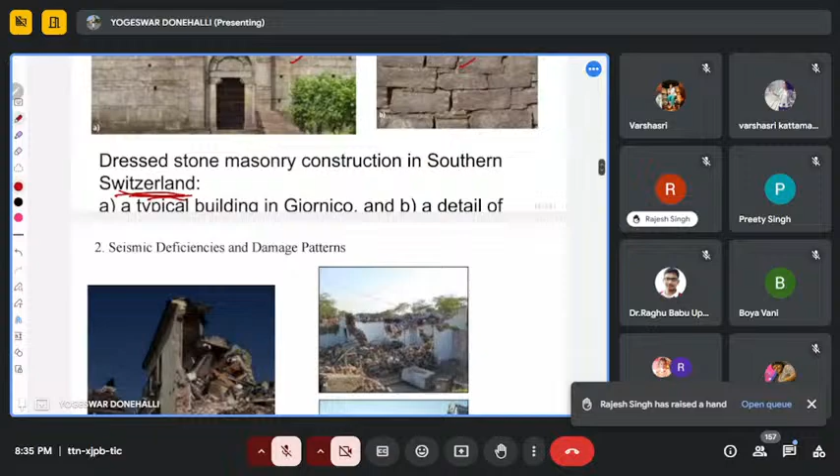Next, you can expect the same thing here also in Switzerland - same collapse, damage, here damage, here damage. Why all these things fail is because we are not bothering about the force or stress distribution from one place to other place. That is the major one. See how buildings are collapsed.

Now come to the technical lack of structural integrity. Probably this term a pre-speaker has also used, structural integrity. Whenever force comes, see here, this pushing effect is there, but unfortunately here and here the joint is not in a proper way, so in between the bulging action may take place, out of the plane. So force is acting, immediately for this point movement is acting, it may try to bulge in lateral direction. Whenever it tries lateral direction, the joint is not proper, that means more displacement takes place here.

Sir, can you expect displacement here? Sometimes you may expect it at the bottom also, entire structure may move, sometimes it may not move. If you provide a rigid solid slab, more dense material here, light material there, means here is displacement possibility, here fixity is there because it is linked with the ground, confinement is there. If you come to here, there is no much confinement, automatically it pushes. See this figure, this wall may come outside. If there is no much restraining effect, automatically it shows just like a cantilever displacement. All this happens because of lack of connectivity from one element or one wall to other wall, that's why technically they are saying integrity.

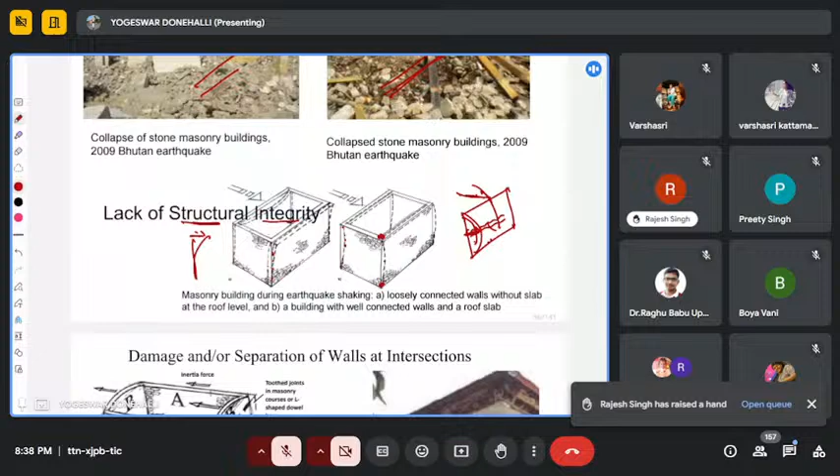There are 4 walls, all the 4 walls not integrated one to one, that is the problem. If you provide one to one connection you can have a scope, of course failure or damage may be at different levels. But ultimately the aim is to minimize human loss or make it zero. So before failure a small time gap will be available to evacuate the place, that's enough to evacuate people inside the house. Property we can get back later by their own earning.

Otherwise, the government may support. But once lives are lost, that may be too bad for our country also.

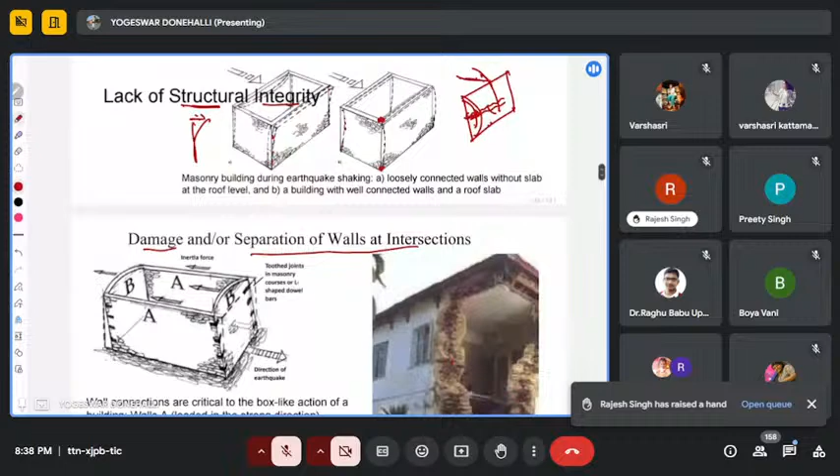Next one, pushing damage or separation of walls at intersection. See the real image at the intersection, it is totally damaged because this is a brittle material. It may not permit much lateral displacement. If we are not providing structural integrity, it immediately leads to collapse, with little time or no time. So a small incident, you can see in the right side of the image.

Prior to that, sometimes cracks may be propagated. The disturbing energy is very less, meaning bearable stages, so a crack may be propagated in this way. See here, this crack is propagated. Still, if the frequency increases, it automatically leads to widened cracks. Up to a certain stage, it may lead to failure.

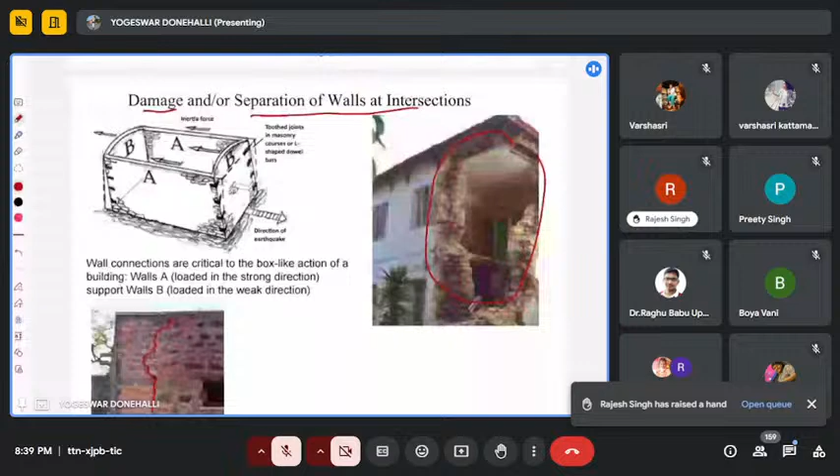So you have to provide structural integrity. The question again, that is the one doubt in our minds. We will see that one also.

See here, one more thing. This is stone masonry, and this is a slab. Are you providing structural integrity here? It is simply resting on the walls. How can we provide structural integrity?

See the corners, lack of structural integrity, in-plane or out-of-plane movements. Anything, any one thing may happen here, out of the plane or within the plane. Within the plane means you take the rotational effect. Out of the plane means only horizontal effect may come here.

Next, by conducting some experiments in the laboratory, we can sense the cracks here. Closely observe this crack, it is a diagonal crack. This also a diagonal crack. Here also a diagonal crack. Why is it not vertical or horizontal? Why does it become a diagonal crack?

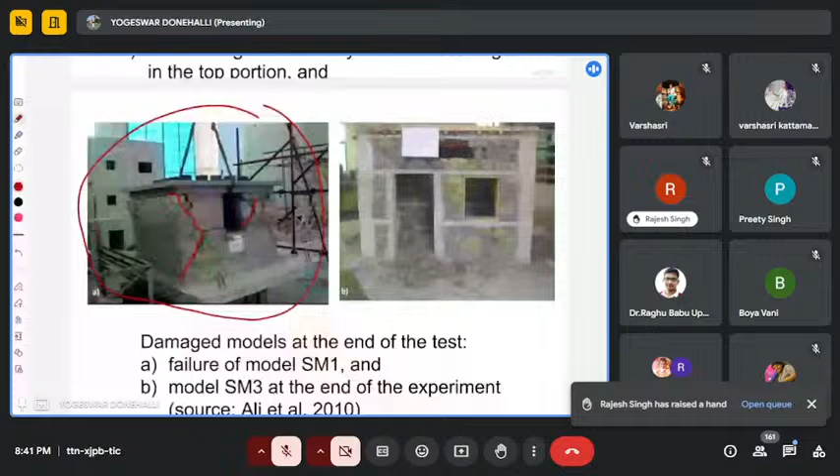Professor, could you please try to wind up the session in 10 minutes? In the last 10-15 minutes we will try a question and answer session and feedback session. Definitely, okay, within 10 minutes I may close it. Okay, thank you sir, very little.

So cracks are here. Whenever the disturbance is there, the shear force is acting, meaning the major consideration is shear force. So whenever the force is created at the bottom, let this be the building, it oppositely gives a reaction to keep the building at a stationary point. So these two affect the shear effects.

Complementary shear stresses may act here. Probably from strength of materials, we might have known complementary shear stresses, in order to close the moment effect to zero. When we resolve these two, automatically it may be propagated into cracks. If you resolve this in the vertical direction, in this direction, in this direction, diagonally, it automatically becomes weak in tension, so the crack may be propagated.

That is one thing. See here, the opening is there, here opening is there, there is a lack of integrity in closing. See the connection, a separate band is provided here.

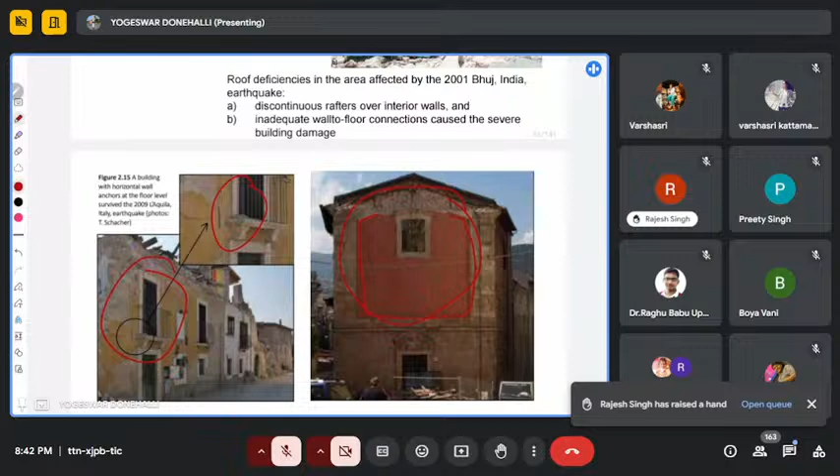That means in-plane, if we take the in-plane action, that means within the plane either movement or within this plane only, that may be strengthened by using some arrangements, which we will also see. See, there is a lack of integrity with walls, and the entire roof has collapsed.

Next are these examples. I said shear, whenever the disturbance creates a large gap, it may try to push or move along this side. Then this type of cracks also you can see here.

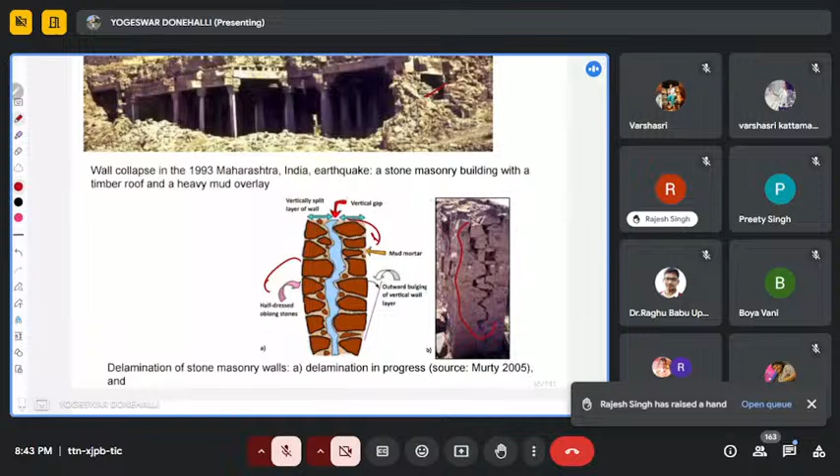So the same thing, I'm going a little fast here. Within this plane, not outside the plane, within this plane only. If you take this as the plane, within this plane. So here also, out of the plane, this out-of-plane effect is coming.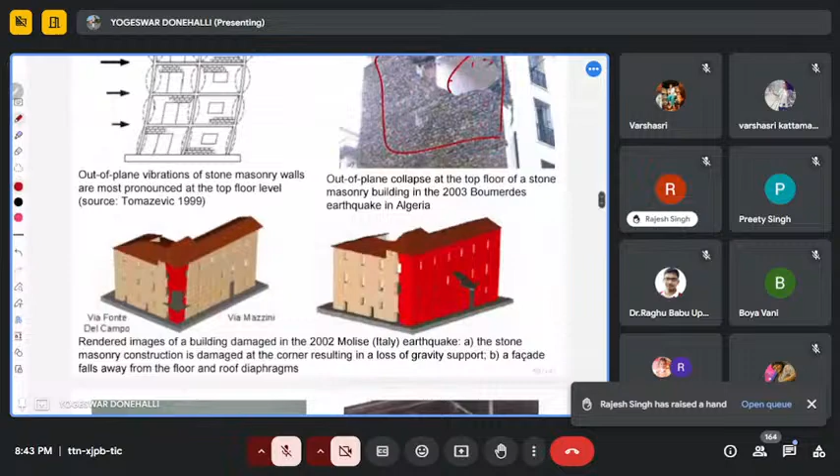See here, out of the plane. This is one plane, meaning this material is coming out of the plane. So a few more examples here of in-plane and out-of-plane.

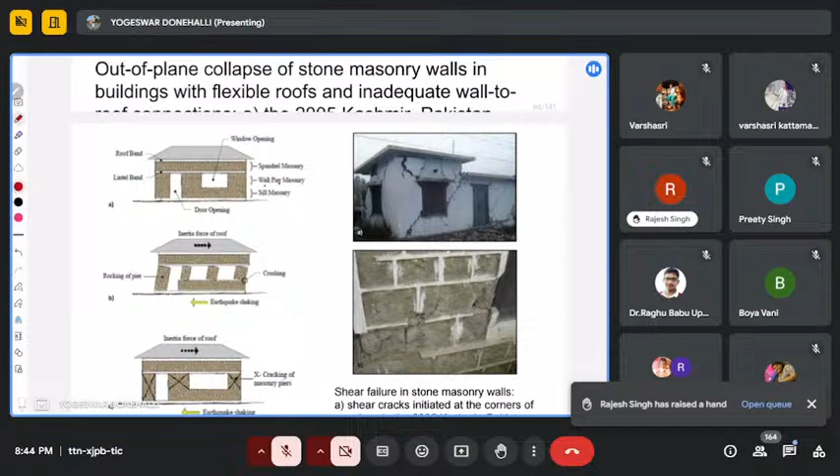One provision is, see here, in short duration I may complete. So here, sill masonry, wall and spandrel here. So you have to make the integrity, which I will show here. These are the examples for in-plane and out-of-plane.

Moving to straightaway resistance, how to improve the resistance. I will check. So one more, generally in rural areas, you can provide through stone. This is one of, just like a recent method we are calling the shear walls.

At one location, through the stone, that means from this side to that side, we are providing only one stone. At that part, shear capacity is more by using the through stone. So one more prevention is you have to provide mesh shear, especially at corners. That's also a possibility to reduce the effect.

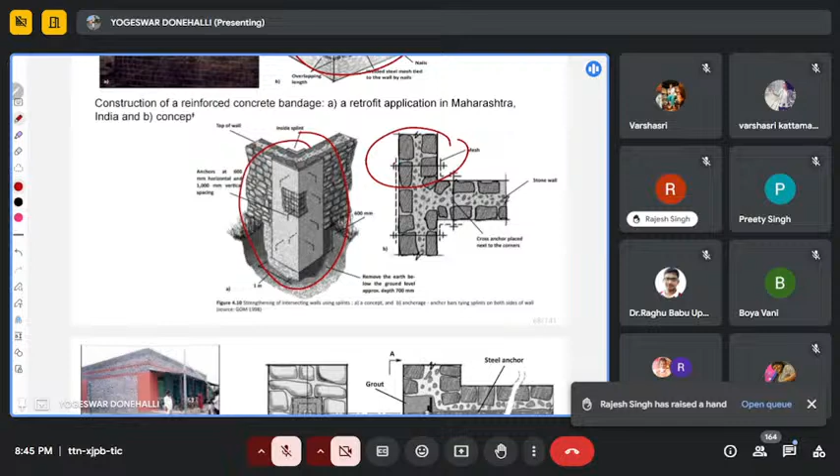So here at corners you have to provide the bands, this connection. You are providing reinforcement from one side to the other side with a nut and bolt system. See here, this is the rod, and here the nut and bolt system. That means you are providing resistance to bulging.

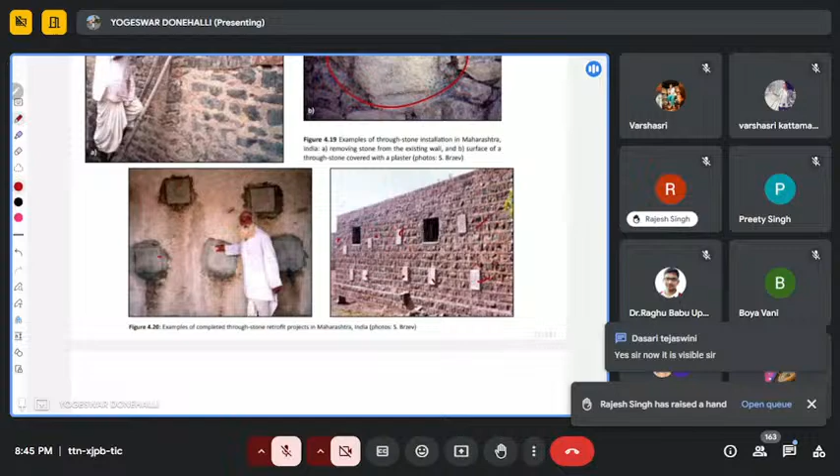Next I'm showing a few more important images. See here through stones, already I mentioned these in some places. In one view you can see 1, 2, 3, 4, 5, 6, 7, 8. These plates act as shear resistors. See the through stone in the cross section of the wall acting. Whenever it cuts, cutting this piece is highly difficult rather than the joint.

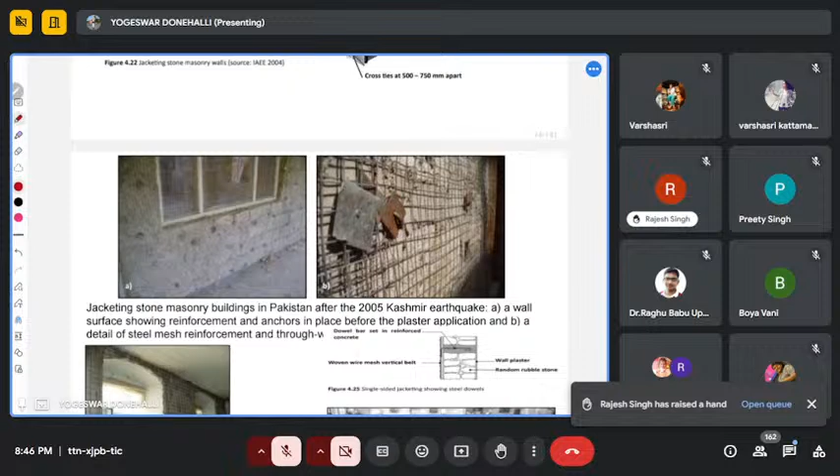So sometimes you can provide mesh also. If mesh is there, confinement comes to this masonry. So one more thing is like a layer of steel bars, providing steel having tensile capacity. That's why it increases the capacity of the wall.

See here inside, these are a few images. I will show with one slide and complete all the things. So here all the corners in the plan, you are providing the rod, running the rod here and there, so diagonal cracks can be minimized.

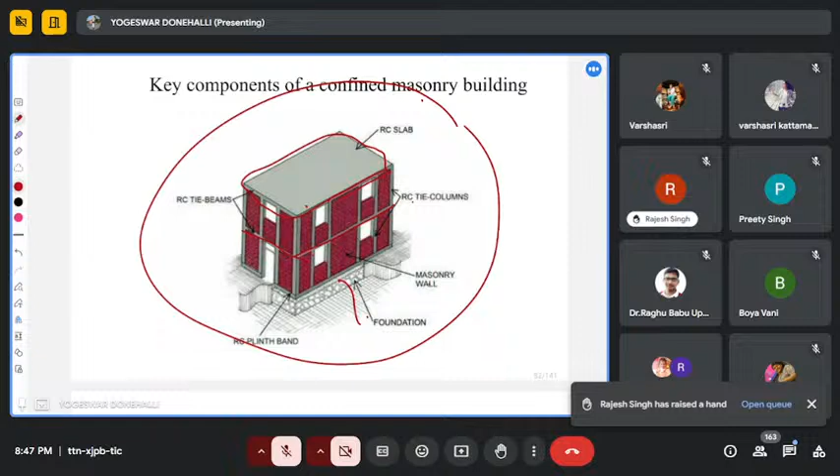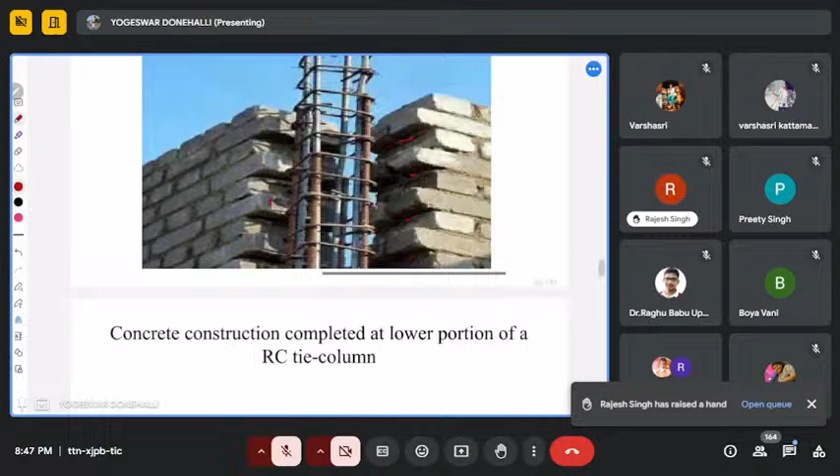So you can see this. Sometimes when you are putting the concrete, the adjacent side has free space. This may act as a shear connector. See here, this gap is there, this gap. See this gap is there, this may act as the shear connector. That means a certain space is embedded into the masonry to the column.

See the bands: plinth band, sill band, lintel band, and roof band. These bands act just like stirrups for the column. Whenever the load comes disturbing the activity, it may buckle. So when the distance is small, one step to the other step, the load-taking capacity is also more, and the yielding capacity is also more. So the failure mechanism, already I told you, in brick masonry. This is also the same image, just like keys.

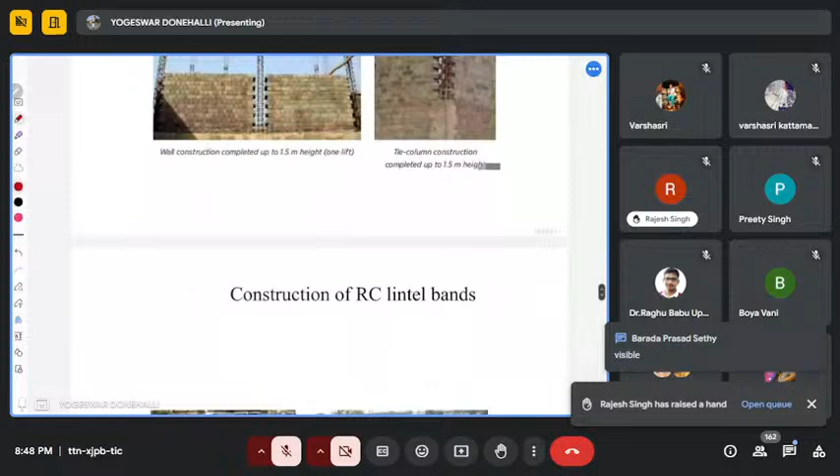Masonry construction - those are the precautions you have to take while constructing masonry buildings.

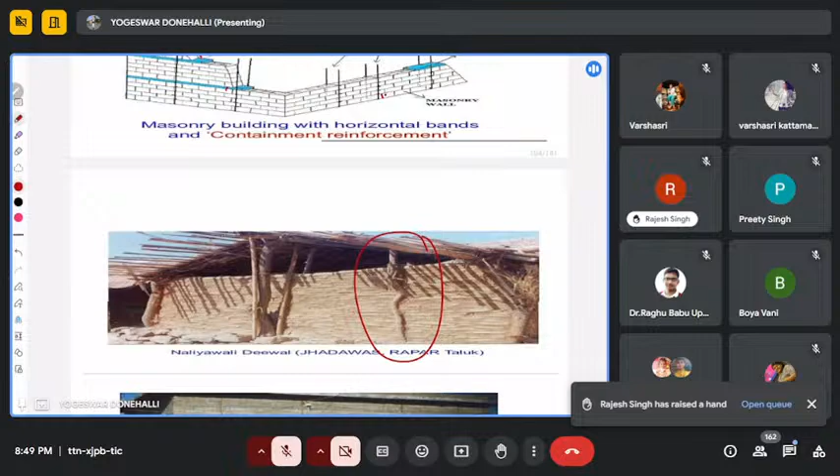Sometimes these rods are also provided externally as lateral stirrups for containment. Like this, bands you have to provide: here band, here band, here band. Necessary vertical rods also at regular intervals you have to provide. Then you have to provide the mesh. Ultimately, what you have to learn is that structural integrity is required. So even unknowingly, sometimes for villages also we are providing stiffeners. That's all about masonry buildings.

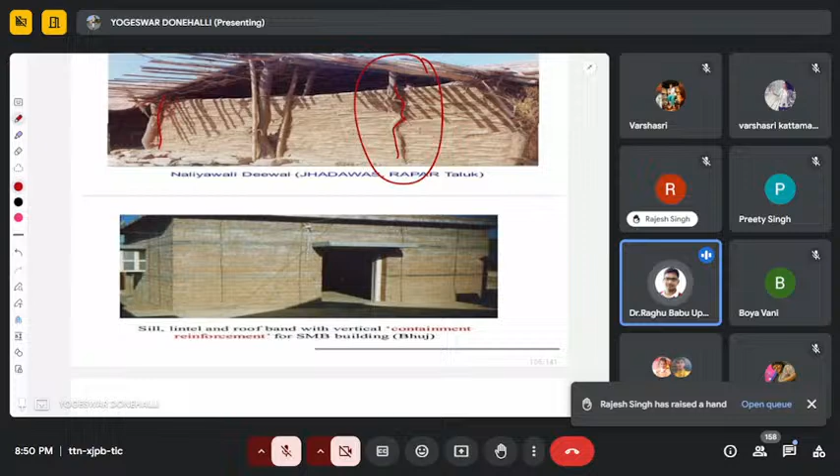Professor Shashidhar, sir, are you there? So probably... is there? Shashidhar sir, are you there? One minute, one minute, he may join. Yeah, he may join.

So strictly speaking, one more effect is there, wind effect. So far we have discussed about earthquake only. I kept wind effect also, but however due to time constraints, I may close with the earthquake effect for masonry buildings.